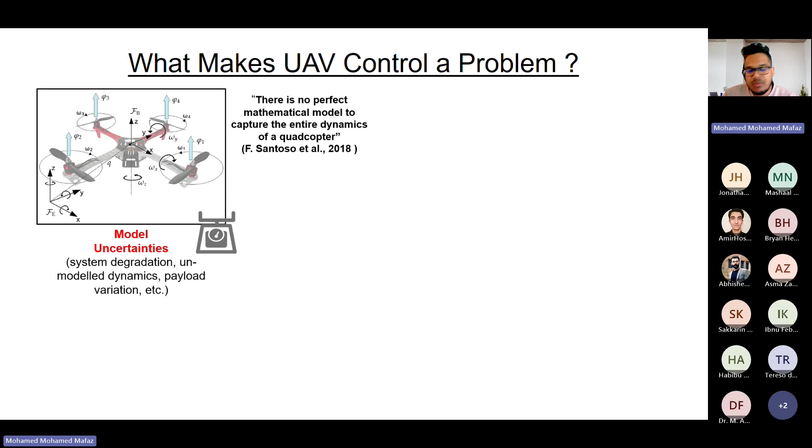Now, the first question that might come to mind is what really makes UAV control a problem? I would start with model uncertainties. There are many drones out there, but all these drones, when they are designed, they are designed based on a mathematical model, and this mathematical model is not always accurate. There are so many uncertainties. For example, system degradation, unmodeled dynamics, payload variations, and so on. And according to the literature, there is no perfect mathematical model to capture the entire dynamics of a quadcopter.

Then, when you design a drone and you go out to fly, there are external perturbations. These can be wind, turbulence, and many other factors. For instance, in the UK, it is very windy, and during windy times, the drones are a bit uncertain because they might drift slightly away from their reference point. So taking these external perturbations into account when designing a control for a drone is very crucial so that the drone doesn't crash into a building or a person.

And finally come faults, which is going to be the main focus of this topic. Recently, I came across a video where a drone was tested for package delivery. I'm not quite sure of the company, but when they were trying to deliver an actual package to an actual person, it crashed onto the person. That tells us there is a problem for the industry due to faults and malfunctions in drones that can cause severe damage or even deaths. So UAV control in general is a problem, and faults in particular are of interest to many people in this era.

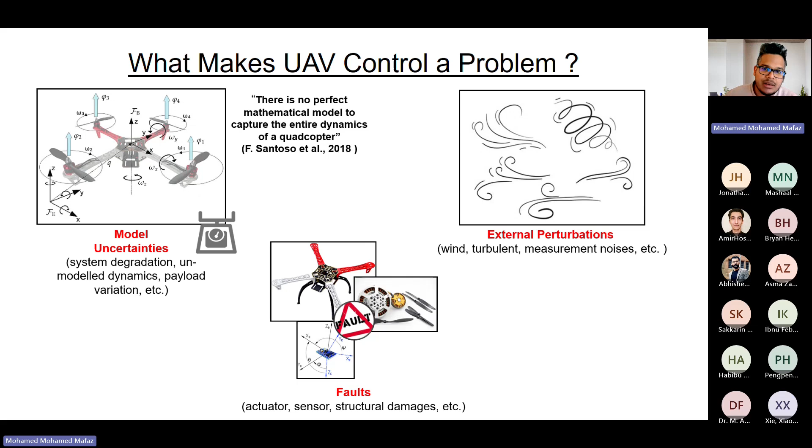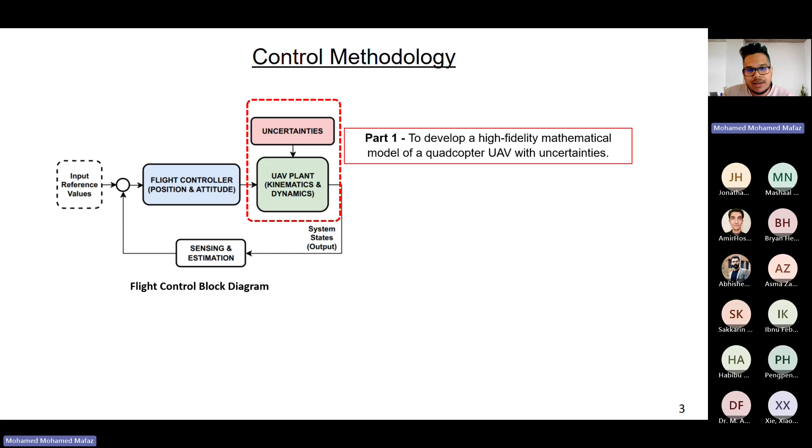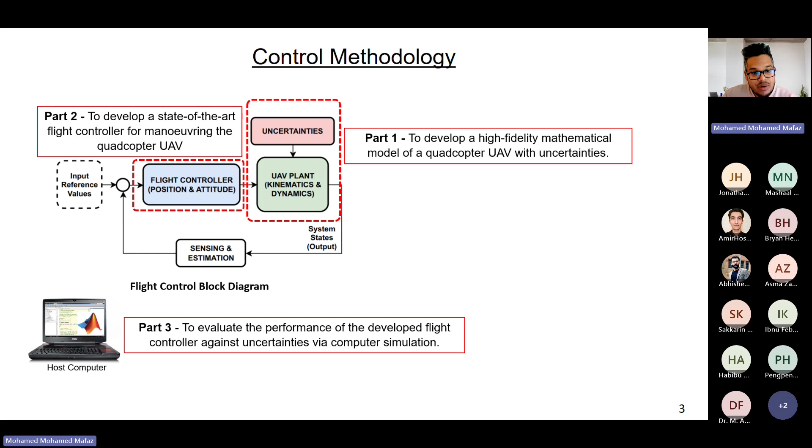Now, this is a block diagram of a flight control, which is the main methodology of my research area. It has four main parts. Part one is developing a mathematical model that is fairly accurate and has all the uncertainties required to design our control algorithm. Part two is the development of this control algorithm and how we can make it robust to faults and various other uncertainties and maintain a stable flight even when faults, motor faults, or anything happens. A third part is to evaluate how well this control algorithm performs via a computer simulation.

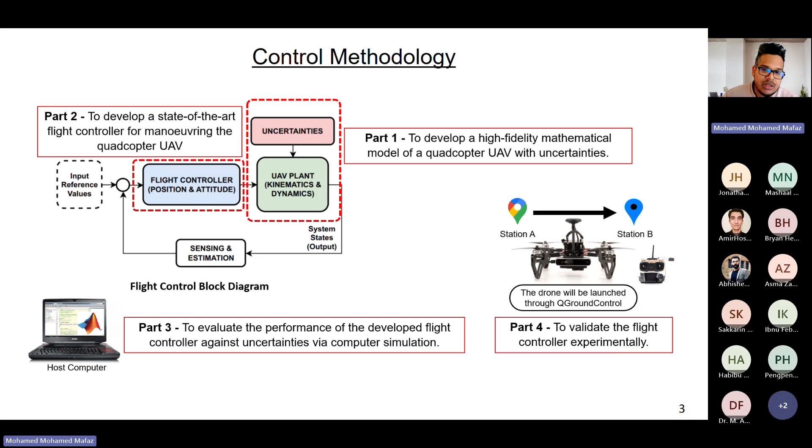And the fourth part of my research is, okay, we designed something that works very well via computer simulation. How well will this same algorithm perform when we deploy it to an actual quadcopter and fly it? So I'll be talking about these four parts of my work in this presentation. So first, let's look into the mathematical model. I'll keep it a bit high level. I won't go very technical.

So the first thing is when we design a mathematical model for the quadcopter, we come up with a set of assumptions. One assumption is that the quadcopter is considered to be a rigid body, which means there is no motion with respect to the body frame. For instance, flexible bending and movement of the components on board are considered negligible.

The quadcopter is also assumed to be symmetrical with constant mass. Also, there are different configurations of a quadcopter. It can be considered as a plus or as a cross. But for my research, I've selected an X-configured quadcopter physical layout because industries and various quadcopter platforms use this X configuration for their physical layout.

Then the quadcopter can move and rotate in 3D space, and the motions are generally movement along the N, E, and D axes. N, E, and D refers simply to the north, east, and down axes. We don't consider up for the model due to certain reasons, which I won't go into in detail. But the drone can move along the N, E, and D axis. Then it can roll along the X axis, it can pitch along the Y axis, and it can yaw along the Z axis, which means it can move along 6 degrees of freedom.

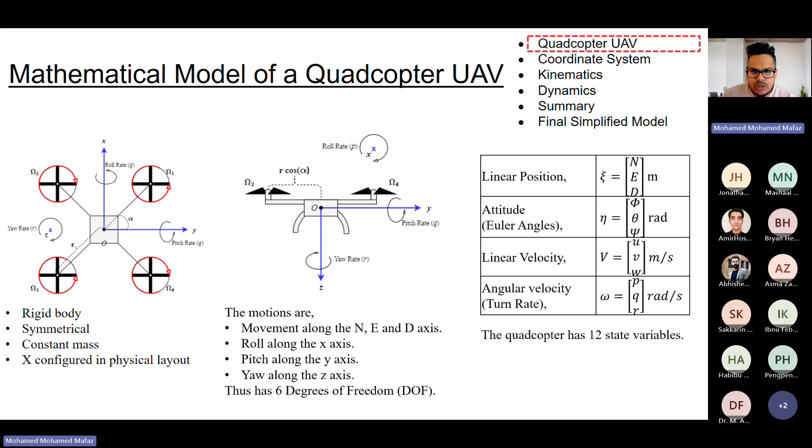And it has 12 state variables, which are linear positions. We call it NED, which is the altitude, the lateral and the longitudinal position. Then we have the roll, pitch, and yaw angle. Then we have the linear velocity, which is represented as U, V, and W. And we have the angular velocity, which is represented as P, Q, R. And these variables are related to each other by a set of equations which describes how their motion changes over time. We'll look into this a bit more, and then we'll get into the second part, which is the control.

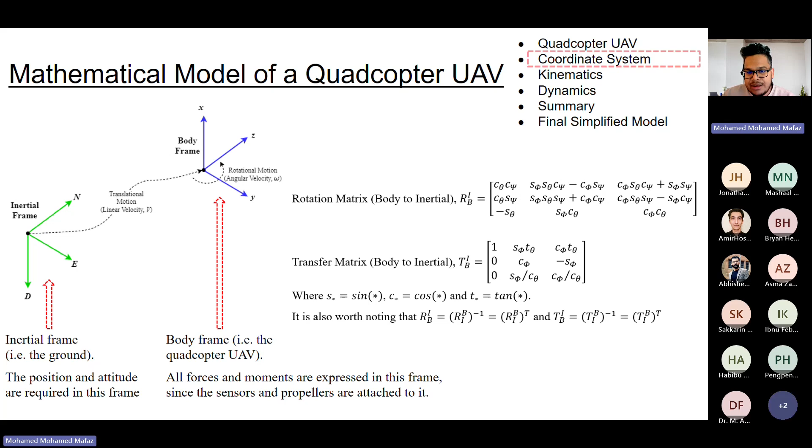Now, the inertial frame, that is the ground, and the body frame, that is the quadcopter, are shown in the figure. The equations of motion that describe the changes in the position and attitude of the quadcopter are with respect to the inertial frame. However, we all know that the forces and moments are expressed within the body frame because the sensors and the propellers are attached to the drone. Therefore, we need some sort of a mapping. We used the Euler angle approach to model the rotation matrix R and the transfer matrix T to transform between the body frame and the inertial frame. And these two equations are shown on the screen.

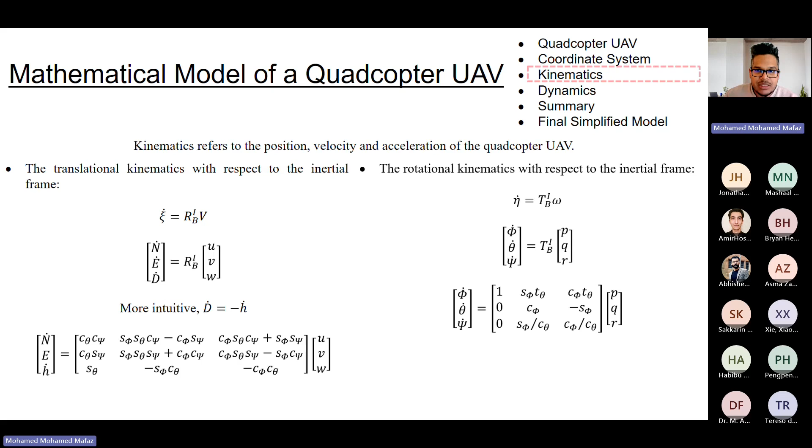Once that's done, we move on to kinematics, which refers to the position, velocity, and acceleration of the drone. It relates the motion between the inertial frame and the body frame using the coordinate system. The translational kinematics with respect to the inertial frame is related using this equation, where linear velocity in the inertial frame is equal to the rotation matrix multiplied by the linear velocity in the body frame. And similarly, the rotational kinematics with respect to the inertial frame is related using this equation, where the derivative of the attitude in the inertial frame is equal to the transfer matrix multiplied by the angular velocity in the body frame. So once we derive these kinematics, we look into the dynamics of the drone.

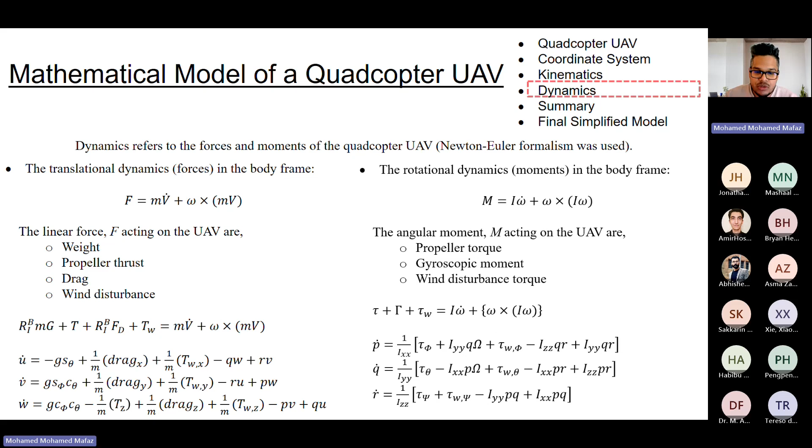So dynamics refers to the forces and the moments of the drone. And to derive this, we use the Newton-Euler formalism. The translational dynamics, that is the forces acting on the drone, is expressed using the well-known force equation F equals ma. And the omega cross mv here refers to the centrifugal force. Similarly, the rotational dynamics, that is the moments acting on the drone, is expressed using moments equal moments of inertia times the angular acceleration. And the omega cross I omega refers to the centripetal force here. That's quite a bit of mathematics there.

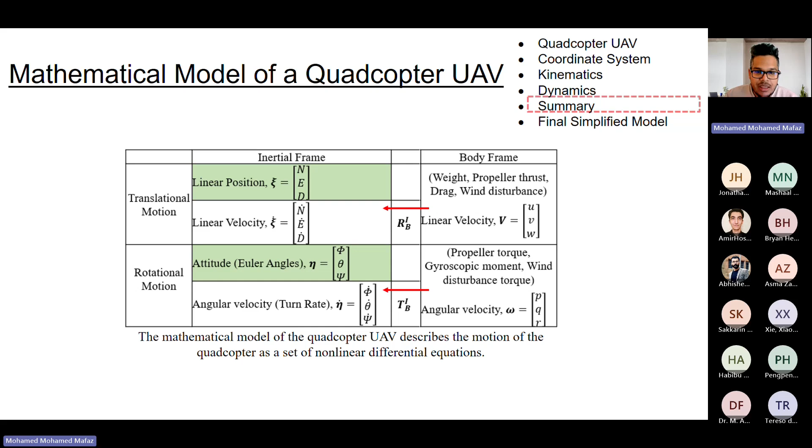In summary, we derive the dynamics of the quadcopter in the body frame because the sensors are attached to the drone, and we use the coordinate system to derive the kinematics in the inertial frame. And then finally, we also derive a simplified model of the full nonlinear quadcopter for tuning and designing purposes. So we used a simplified model to tune our algorithms and develop algorithms, but we test these algorithms on the full nonlinear model of the drone.

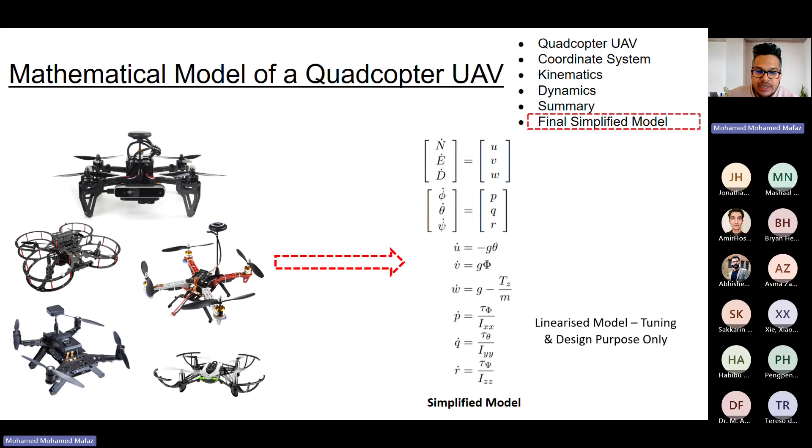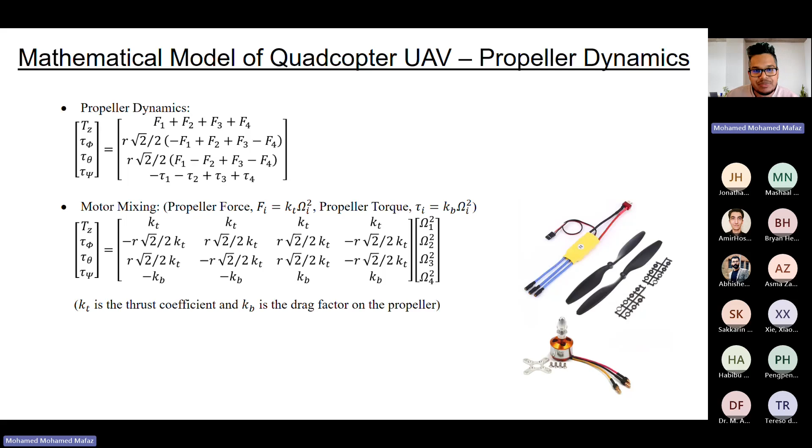Apart from the quadcopter, the drone model itself, there is a bit of propeller dynamics. It is also derived as the thrust and torque are generated by the propeller, and it directly affects the motion of the drone. The quadcopter is controlled by adjusting the control inputs, which alter the speed of each motor through something called the motor mixing algorithm. And for each quadcopter propeller, there is a force generated and also a torque about the center of gravity of the vehicle. And the coefficient KT and the coefficient KB you see on the screen are the thrust coefficient and the drag factor of the propeller respectively. So that's all about the mathematical model. I wouldn't want to speak more about the mathematics.

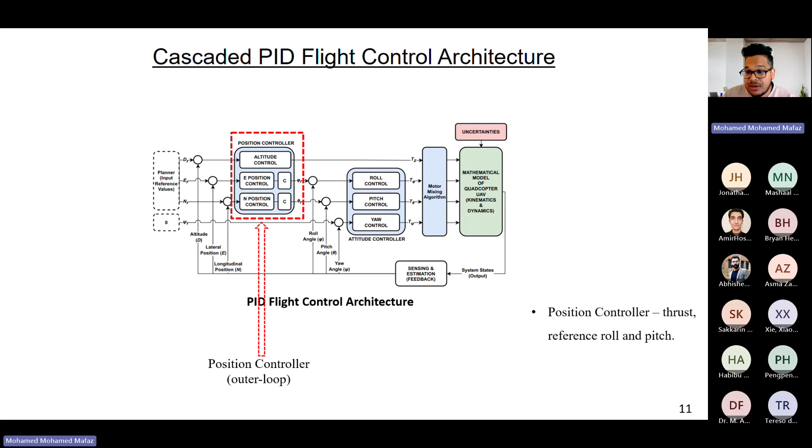So in terms of the control, I'll talk about a simple PID flight control architecture. So there is a position controller, which is the outer loop. What the position controller does is it is required to maintain the altitude of the quadcopter with respect to the reference altitude. And also it tracks the longitudinal and lateral position and provides the reference values for the roll and pitch angle with respect to the reference longitudinal and lateral position. Then we have the attitude controller, which usually works at a higher frequency and generates the rolling, pitching, and yawing torques to stabilize the attitude of the quadcopter.

Then we have the planner, which generates the trajectory. It consists of the reference altitude, position, and the yaw angles. We have the output from the controller, which is the desired thrust, roll, pitch, and yaw, which get mapped to individual rotor speeds through the motor mixing algorithm.

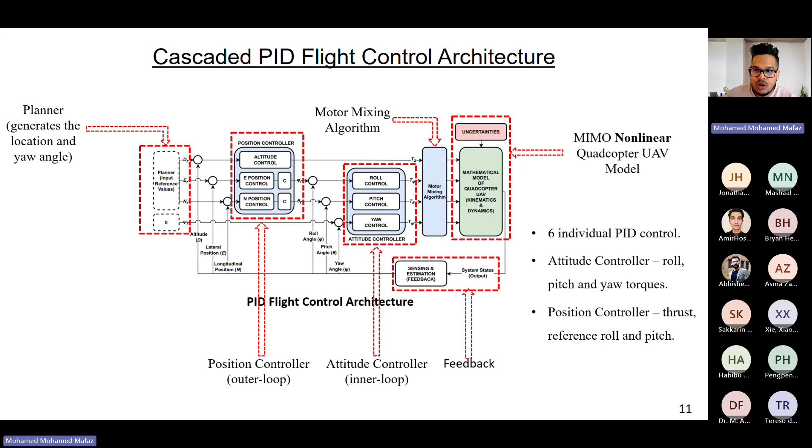The controller works for the fully nonlinear quadcopter UAV model, which we discussed previously. And the feedback from the model is used by the controller. And there are 6 individual PID controllers, which all work together to stabilize the drone.

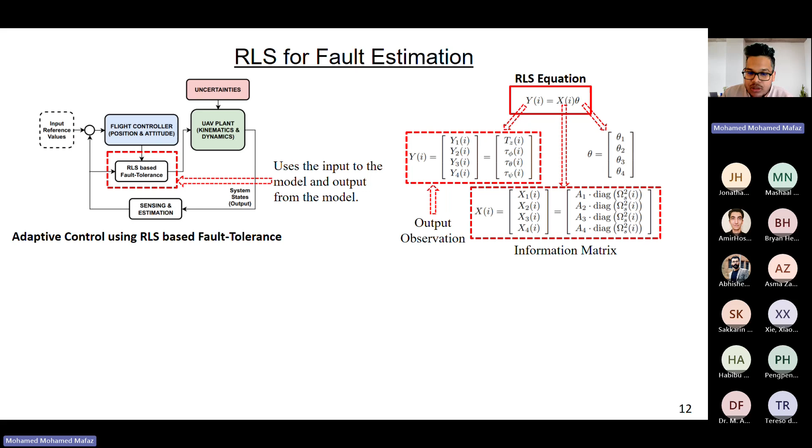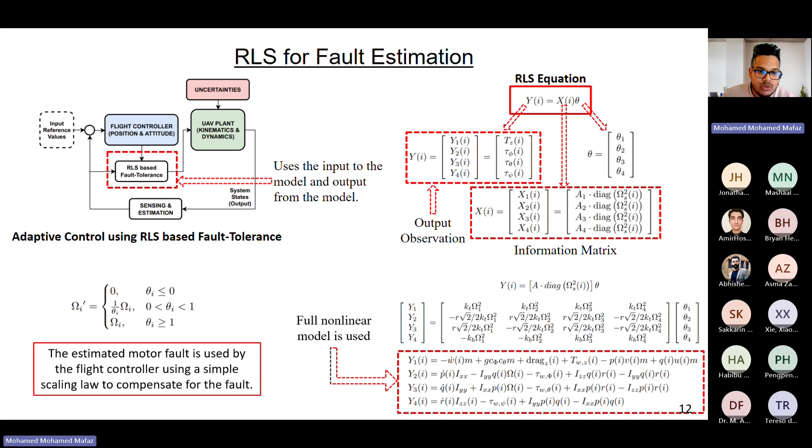So the RLS equation is y equals x theta. Y is the output observation, x is the information matrix, and theta is the parameters to be estimated. And in our case, theta is the faults that we want to estimate. The full equations are as follows. It uses the full nonlinear model. And finally, once these are estimated, the estimated motor fault is used by the flight controller using a simple scaling law to compensate for the faults.

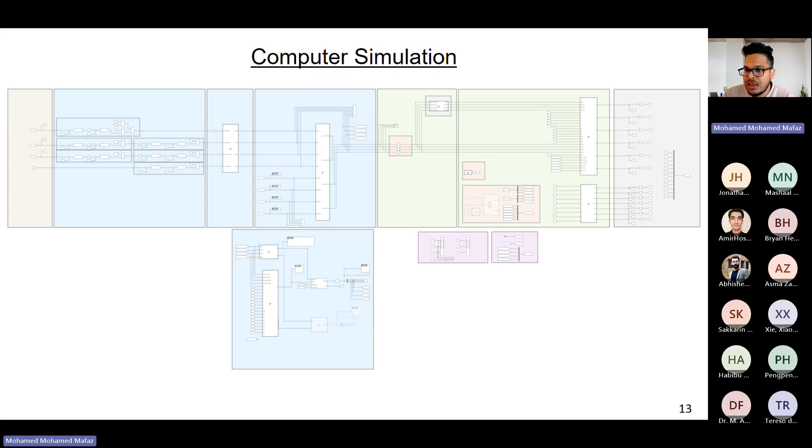Let's get to the more interesting parts. Now the mathematics are over, the control algorithms, the equations are over, and now what we developed in action, how it works in simulation and practical flight test. So the picture here is a Simulink model we built. It has the mathematical model of the drone.

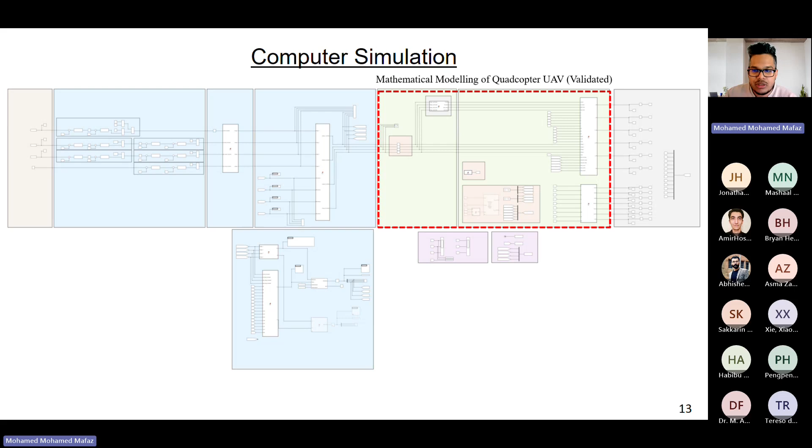The dynamical response of this mathematical model was first tested before we bring it to the simulation. And then it has the control algorithm, which we developed. It has the planner, which generates the reference values for the control. We have the noise added to our measurements. And then we have scopes and visualization to see what's happening in various parts of the simulation.

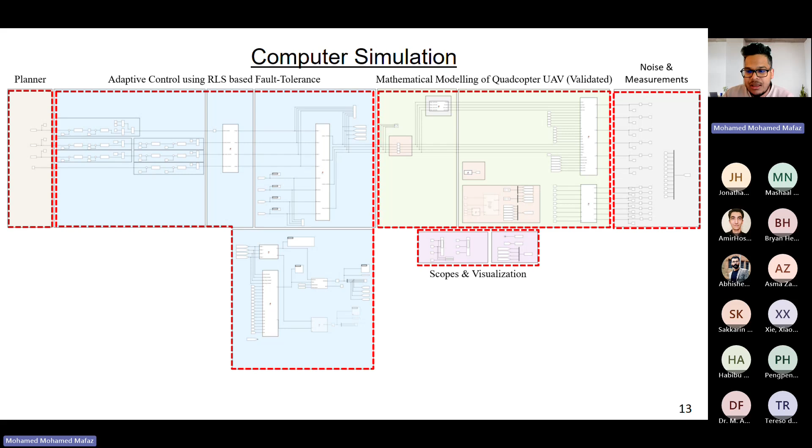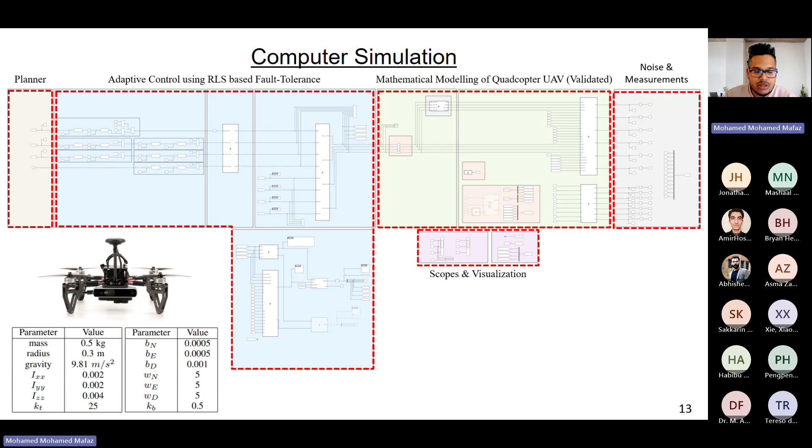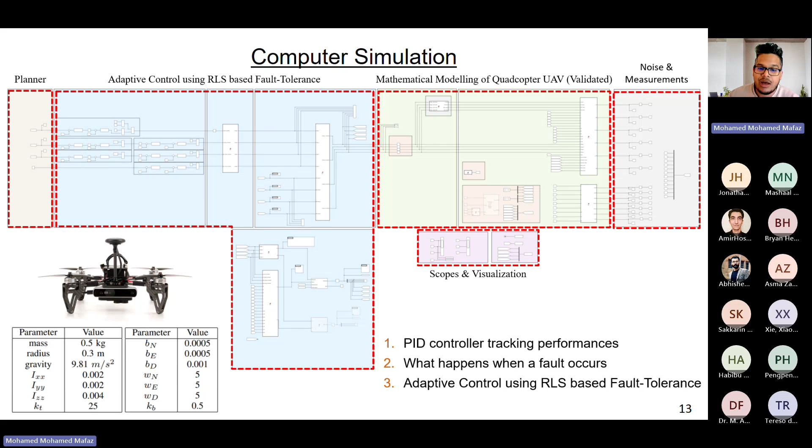The model parameters used for the simulation and the respective values are shown here. This is from a drone we have back in our center, and we got these values based on some approximations. And first three main experiments were done with the simulation. We checked how the controller works in a normal situation and what happens when a fault occurs and how our controller reacts to faults. So I'll show some simple animation here.

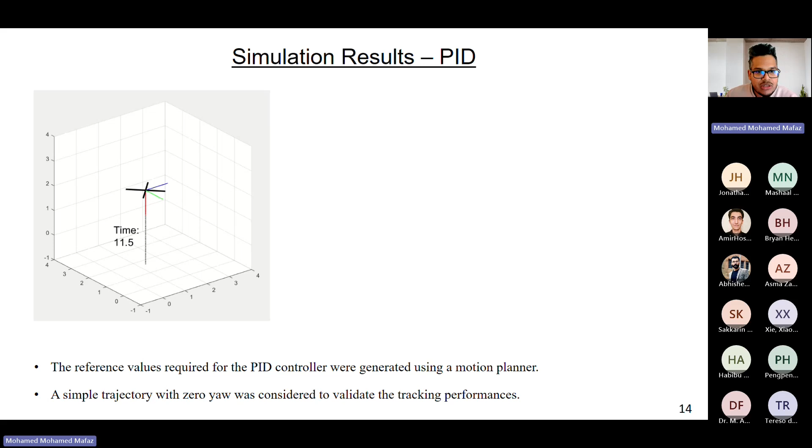So we tested out our PID controller, and the reference values for this were provided by the motion planner. A simple trajectory with 0 yaw was considered to validate the tracking performance. So the results were good as expected in the simulation. The controller was working fine. The model was representing an actual quadcopter close enough, and we were able to see fairly good results. So you're seeing a drone following a trajectory. I won't wait till the entire simulation runs, but let's go further.

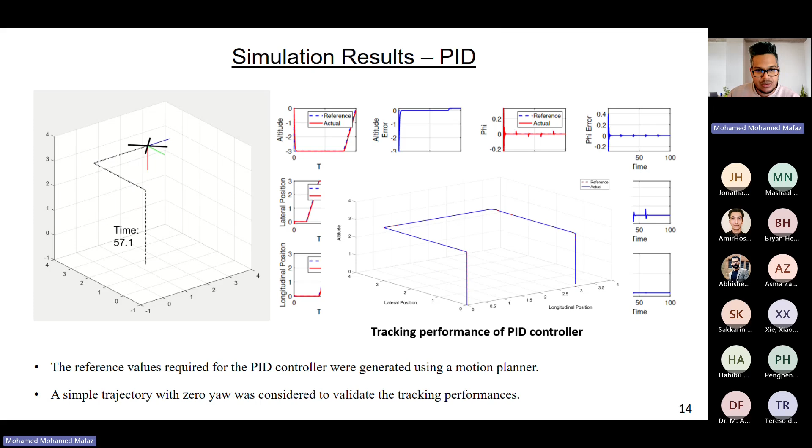Then we wanted to test out how the same algorithm performs when an actuator fault happens. So actuator refers to a motor. So when one motor reduces in efficiency, maybe a coil burnt, something happened to a specific motor, how does the drone react? So first, we considered one motor fault, and we just degraded its performance by 10%. So it was tested out with 0.9. It's represented as 0.9, which means there's a 10% loss in efficiency. And there was offset, but the drone was able to still maintain some trajectory.

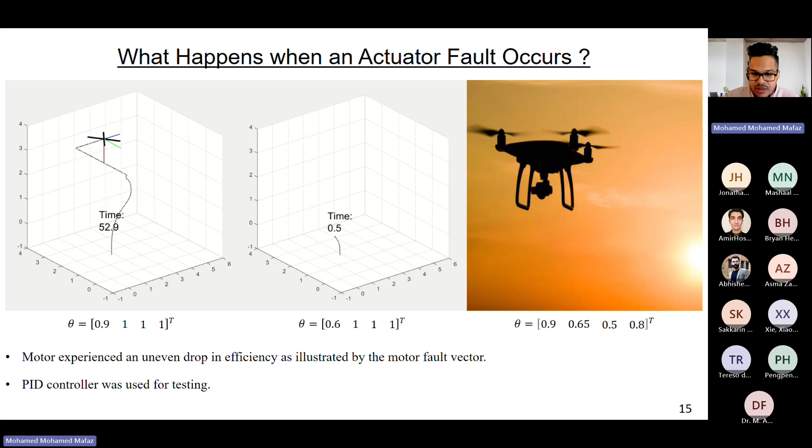It didn't crash. When we increased that 0.9 to 0.6, which means a 40% reduction in the efficiency of the motor, maybe 2 or more of its coils have burnt out, let's assume. In that case, the drone simply crashed. And we took this further, of course, to 4 motor faults where every single motor experiences different efficiency drops. And we wanted to see how that happens, and as expected, it simply crashed.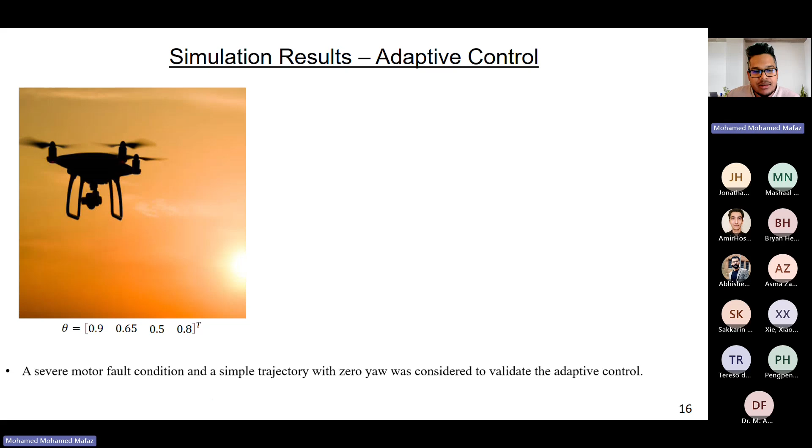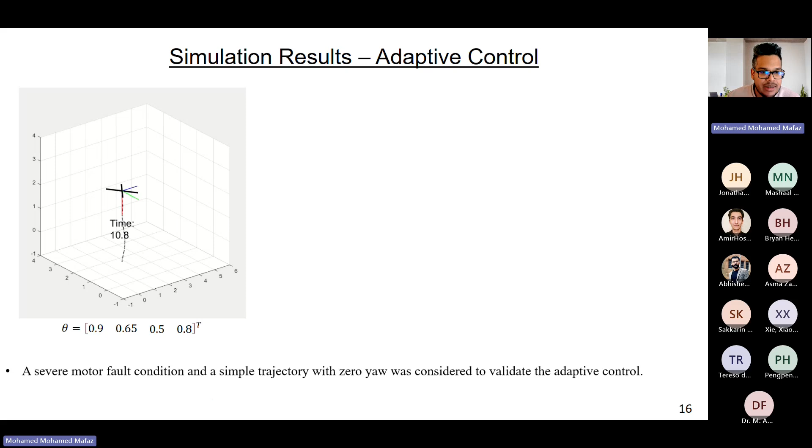Then for the same severe motor faults condition we saw earlier where the drone just crashed, we wanted to try out how our adaptive control worked, and with our proposed algorithm, even during this severe motor faults condition, it was able to still maintain trajectory. The results were very impressive, and as can be seen from this figure, the motor fault of each motor was accurately estimated within 0.04 seconds, and various other faulty conditions were also tested, and in all those situations, the drone was able to maintain trajectory.

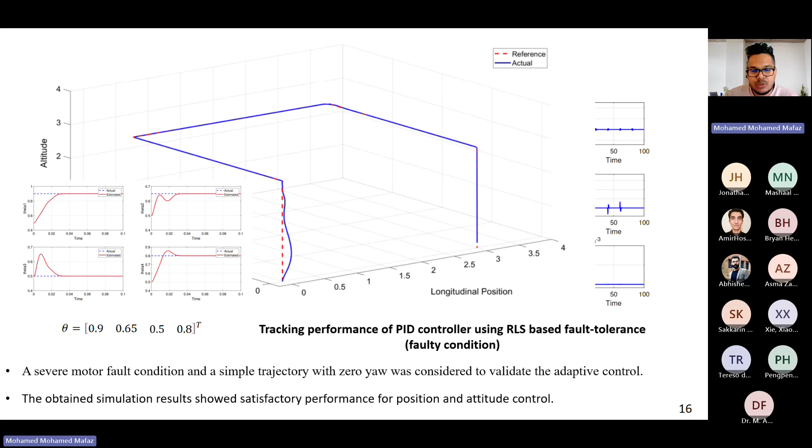Now, if you all have done practical work, many of you will agree with me. How it works in simulation is not how it works in practice. In simulation, everything is perfect. It's a simulated world. Most of the time it works in your favor. However, if you put the same algorithm in the actual drone and go out and fly, you don't see the same results.

So we took our algorithm to the next step. That is, we wanted to test it out practically. And for that, this is my methodology. So the first stage is the plan mission stage. The flight path for the mission is generated using a commercial software called QGroundControl. It's an open source ground control station software used for real flight and also being used commercially a lot.

Now the waypoints generated from this trajectory are used in the design and simulate stage, where the custom flight control algorithm that we tested via the computer simulation is implemented. This stage defines the quadcopter model as well, and runs something called a scenario simulation with tools like Unreal Engine. Scenario simulation is optional, but it adds a realistic flight environment visual to observe the performance.

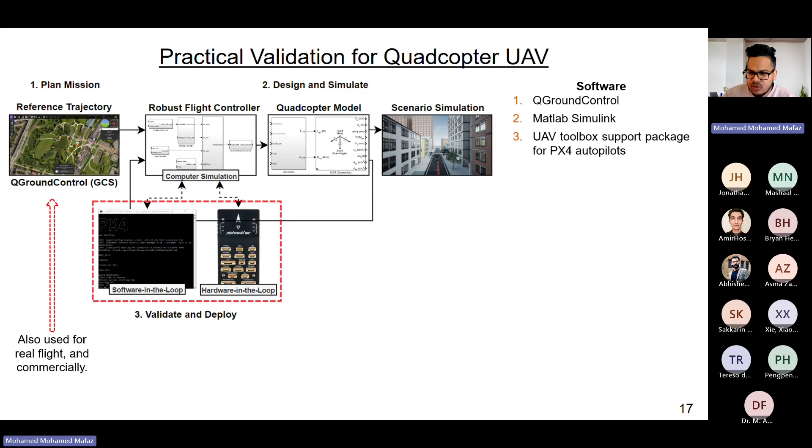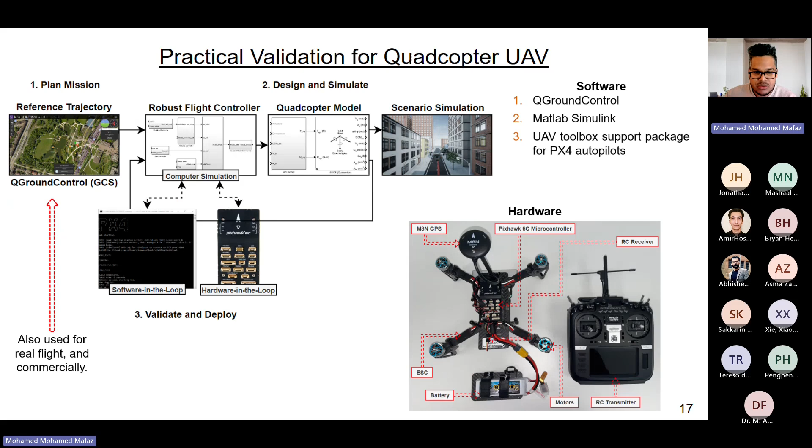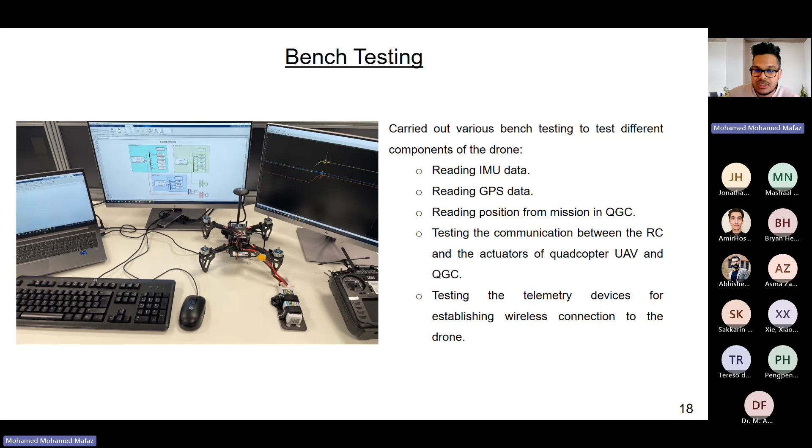We were able to do software in the loop and hardware in the loop. These are different workflows, but for this presentation, I'll focus only on the hardware in the loop. And the hardware is shown here. It consists of the Pixhawk, GPS, motors, batteries, and so on. Before taking the drone out there and flying, it is very important for us to do some bench tests. That is, connect the drone with the laptop, use the toolbox, and test various different cases. We carried out many bench tests to see if the quadcopter responds, if the sensors are working fine, if everything else is working fine.

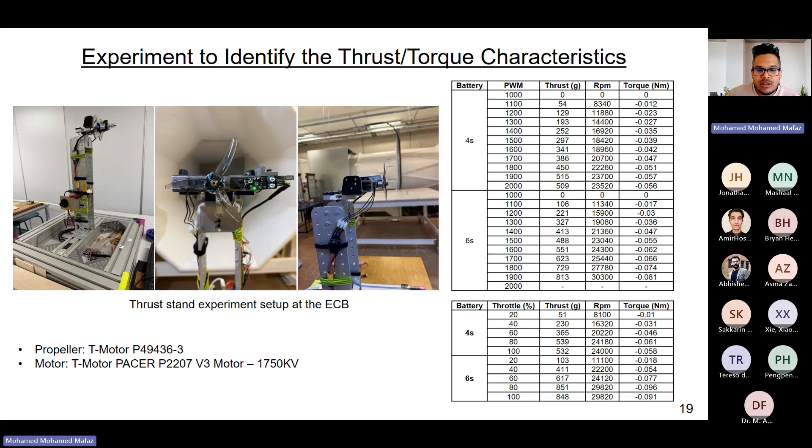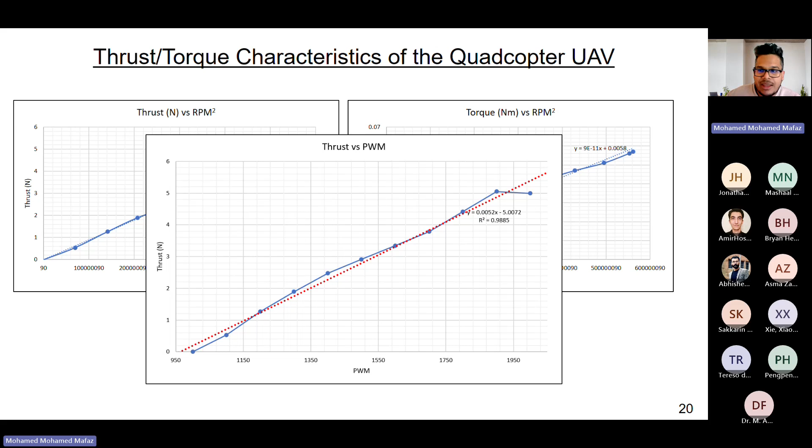We also did various other experiments to make sure that the dynamics of the controller we designed relate to the actual drone. So we needed to find the motor characteristics like the thrust and the torque coefficients. So we used a thrust stand which was available at our uni. We connected one of the drone motors and we were able to collect data, plot data, see the coefficients, and take these coefficients to our controller design so that when we fly out, the drone doesn't crash because of poor design.

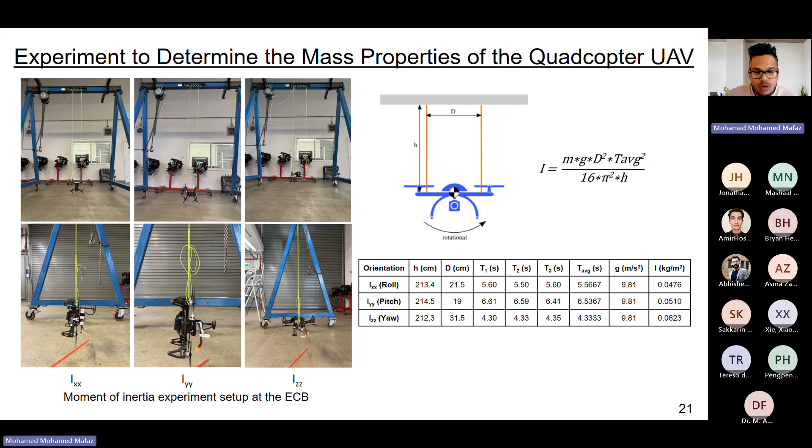We also did some experiments to determine the mass properties of the quadcopter. This is where we hung the drone, oscillated it, and measured the period to calculate its inertia in all three axes. And we were able to successfully do our hardware in the loop testing.

So this is where the drone is connected to the laptop. On the left side of the screen, you'll see QGroundControl, which plans the mission. It's the same software that is used commercially to plan mission flights. Then the mission is planned and the mission is sent to the drone. And on the right side of the screen, you can all see the drone dynamics working in real time.

And also the generated code from our controller design was implemented straight into our drone hardware, which was connected to the laptop, and you can all see everything running in simulation. So this is something called hardware in the loop testing, where the hardware, the drone, is connected to the laptop and you are able to see how it performs.

I guess 2-3 minutes are left, so I won't be waiting till the end of the video, but I'll be going to my next slide.

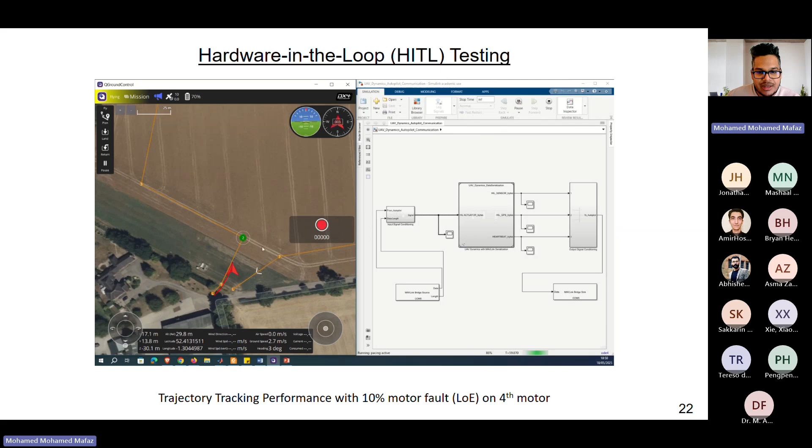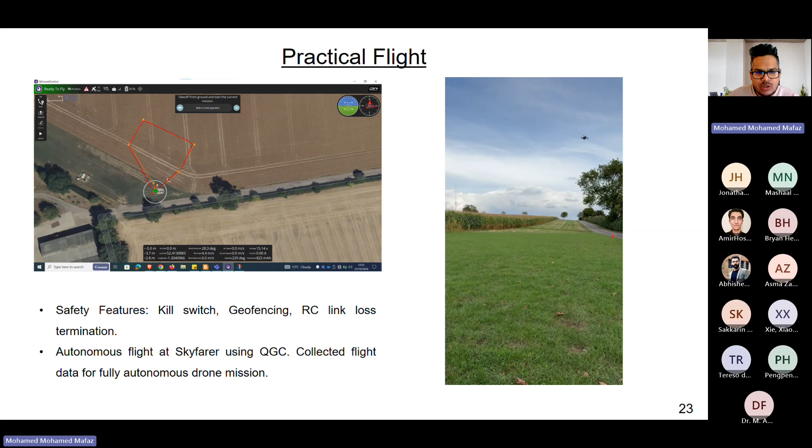So once we were happy with how the drone performed in hardware in the loop, the next obvious step for us was to fly it. So we included many safety features like kill switch, geofencing, RC link loss termination, and we successfully carried out our flight. We went outdoors, we flew, and there's a video showing how the drone flew. Now we did various different tests, like a test in the normal situation with waypoints, and we were able to get various different results.

I promised myself I wouldn't be discussing too many results in this presentation, instead trying to keep it very top level so that we have a wider audience, so that everyone will be able to see what was done in our research.

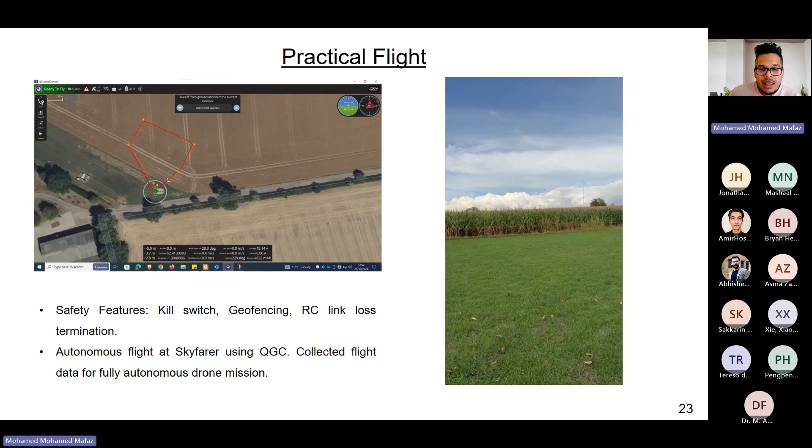So I again wouldn't wait till the entire video. Let me go to my last slide. So I'll talk a bit about limitations, recommendations, and the impact our work created.

So the outdoor flight we did, it wasn't a controlled environment. It was uncontrolled. We didn't have control over winds. There were some GPS inaccuracies because these are quite normal in practical settings. And what we can do is if we suitably have an indoor flight testing environment, that's awesome. We also need to follow CAA regulations when we do our testing, and the UK has strict operational safety regulations. And also the flight controller board we used lacked some amount of CPU and memory resources, so we couldn't test out advanced versions of our algorithm.

Some recommendations are, along with the flight hardware, if we can use a companion computer like the NVIDIA Jetson or a Raspberry Pi to complement the flight controller and to basically transfer the estimation algorithm to the onboard computer to offload the computation within the flight hardware. That's a good recommendation. However, the communication between the onboard computer and the flight hardware needs to sync very well. Also, if you can use optimization to fine-tune controller filter coefficients to minimize tracking errors, that's another recommendation.